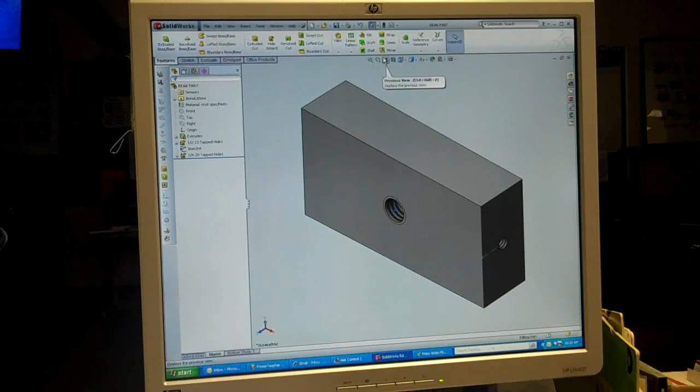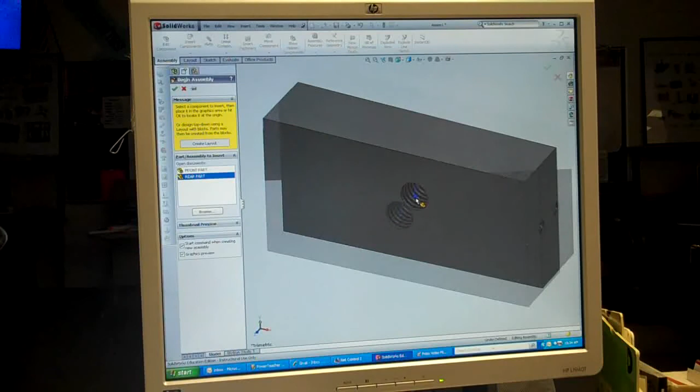To create an assembly, one of the first things you're going to do is go into File, New, and you're going to open up an assembly within SolidWorks. And then you're going to place parts. You should always have your origin on. And I'm going to grab the rear part, pull it in, and once I cross over the origin of the assembly, you're going to see the two origins are going to coincide.

You always need to have a base part, and then everything sort of forms off of that. Okay, so in this case the rear piece is that base part, and I'm going to save that, and we're just going to call it test for right now. Remember, everything's always in capitals. Makes it easier for you when you're creating automatic title blocks. So the assembly now has this in here, and if you look very closely, right in front of rear part it says F. That means that that part is fixed in position and it's fixed on that origin.

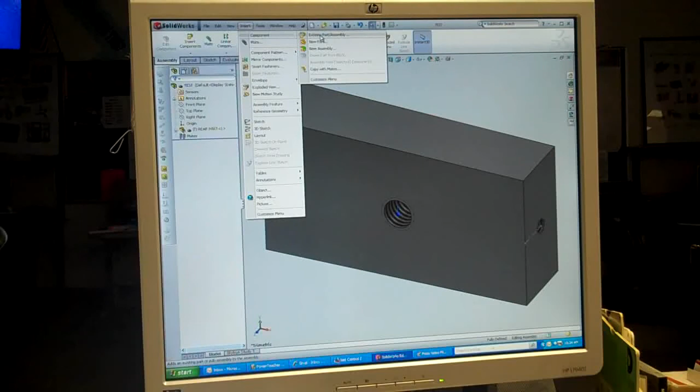The next part we're going to insert is an existing part, and it's going to be front, and we're just going to drag it in here somewhere. Okay, and this is where we're going to get into different ways of constraining things. Now, if these parts are always the same, and in this case they're 4 inches wide and 2 inches tall, one of the easiest ways of constraining the front to the rear is you're going to grab this, and in the book they call it constraints. In SolidWorks we call it mating. So you're going to mate the top surface to this top surface, and you're going to see it move up.

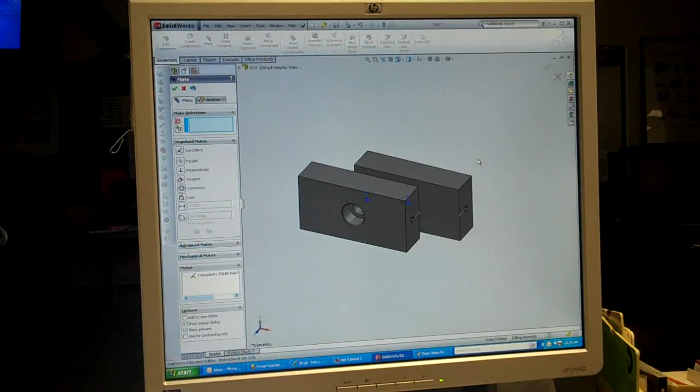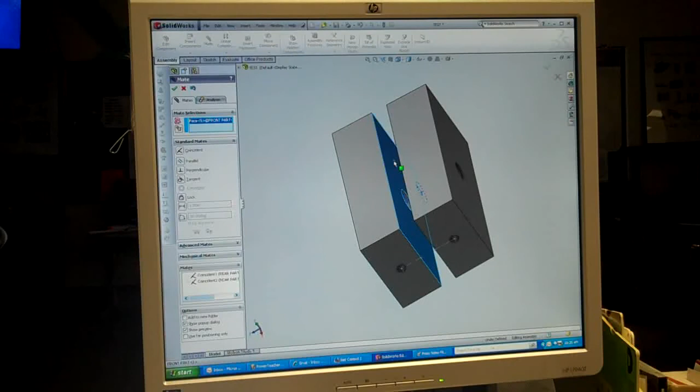So if I went to a front view, I can see that those two top edges, this one and this one, are in a line. And then the next thing I could do is a right face to a right face. Okay, hit the happy check mark. And if I again go to the front, now I can see the top and the right are aligned. And then lastly, we're going to do the back face here and the front face of the rear part, and everything's happy. Okay, this is great if your parts are always symmetrical like this, and they're, say in this case, 4 inches wide, 2 inches tall. Okay, and everything is a happy world.

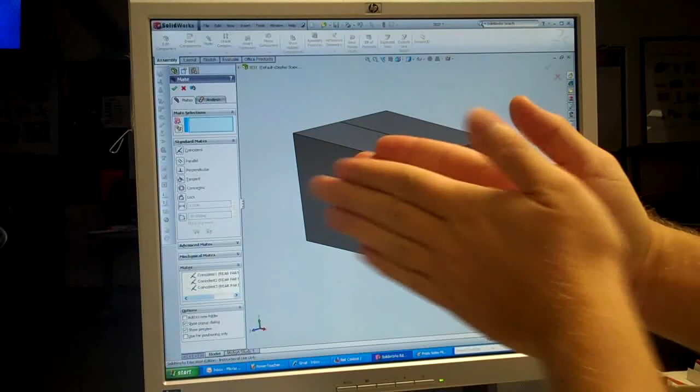But if the back part is still 4 inches wide and you have a design change and the front part becomes 3 inches wide, then you're going to lose your hole alignment. So this is a basic way of aligning things face to face. And the last one that I showed you, the rear face to face, is usually used when you want to have two surfaces mate together, okay? Just like they are here. Imagine it just like this. They're together, and they're not going to move off of that plane.

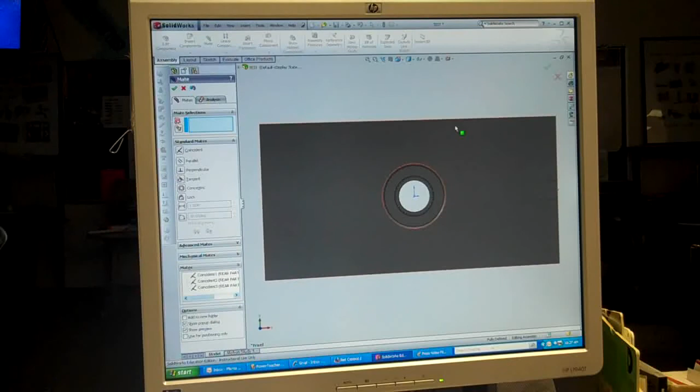But these other things, the top face and the right face, if they change in size, they get taller, wider, whatever, these faces will shift your hole alignment. So if I go to the front view, right now the hole's lined up nice and perfect. So let's look at another way of doing this. Okay, and let's close all this. We're not going to keep this, so I'm just going to close it. You want to save it? No. And the rear part is still up.

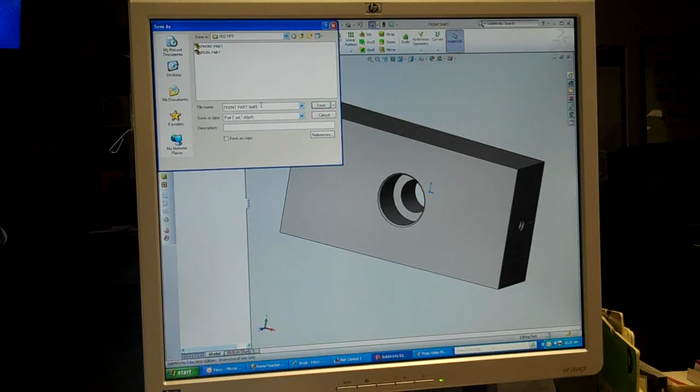Let's open up the front part, and I'm going to save it as front part narrow. Okay, we're going to save that. Part name is up here, and I'm going to change its original size. So I'm going to make it 3 inches wide, and you'll see why in a second. So as easy as that, I can change the size of my part. So the first thing we talked about was faces. Top face to top face, right face to right face, front and back face. Put all this stuff together. Let's do another assembly.

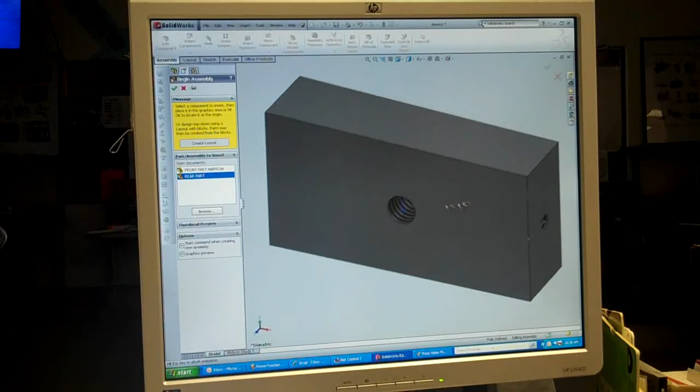And the first thing we're going to do again is turn on our origin, and we're going to throw the rear part in there again, let it find its center. Okay, so it's happy. And we're going to insert a component, it's the existing part, and we're going to do the narrow. Okay, so we're just going to drop it off here.

So right now, the narrow part, if I did faces, the top and the top would still line up. The right and the right, you could line it up, but then your hole doesn't line up. Okay? I would still use, though, this face to this face because they're mounting flush to each other. Okay? So that's not a bad deal, but to get by this, there's two different ways we can do this.

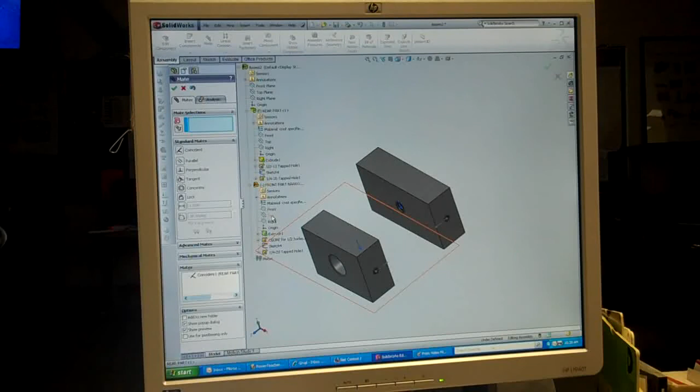Number one is we can do mates also by planes. So if I go and open up my design tree on the front part there, I can use my right plane and the right plane of the rear part, and it's going to line those up. And then I can use the top plane and a top plane here, and that's all lined up.

Okay, so if I look from the front view, my circles are lined up, has nothing to do with the edges of the part. Okay, and then lastly we can do face to face. Okay, and everything's lined up very nicely.

Okay, so that's another way to do planes, but you have to remember when you're designing that if it's going to be something like this where you're going to want to use planes to mate part A to part B to part C and so on and so forth, everything has to be drawn symmetrically off of those planes individually. So this is another way to do it.

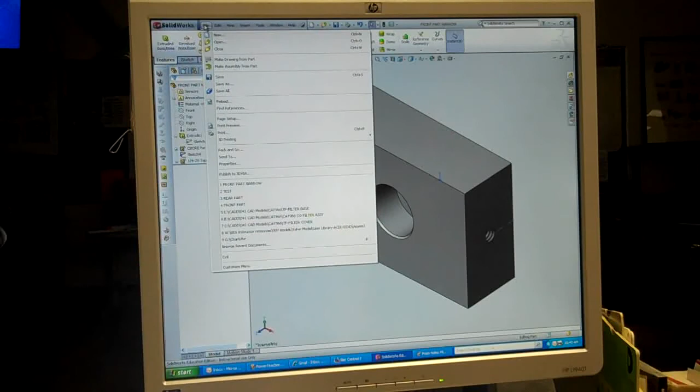Let's look at another way. So we'll get out of this, and we're going to close this assembly. We're not going to save it. And we're going to do another assembly. We're going to turn on our origin. We're going to throw the rear part, let it find its center. Zoom out a little. We're going to insert an existing component, which is the front narrow again.

Alright. And another way to do it is go into View and turn on some temporary axes. So now I have the center of each hole. What I can do is I can do a mate by axis. So I'm going to grab the axis of this counter bore and the axis of this tapped hole. They're lined up. Okay? But they're not totally aligned yet because I can grab it and rotate it.

To get rid of that, I can grab the right face and the other right face, not use coincident but use parallel, and it'll turn. Okay? So it'll always keep it square, so no matter where I move it, it is parallel from here to here, and it is aligned by axis.

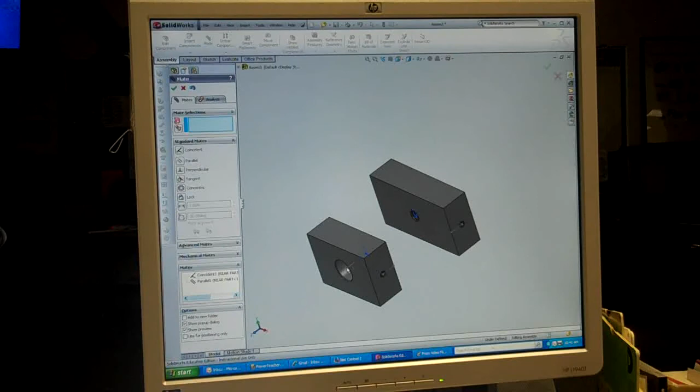Okay? And then lastly, again, we're going to do face to face, which is great when you're doing parts that are flush with each other. So that makes a nice happy part. Okay, happy check mark, and we're good to go.

So we've covered face to face, which works if everything's symmetrical and the same size. We've talked about planes. Okay, that is great if everything is symmetrical about a plane when you're designing. Axis. Axis is great for lining up holes. Okay, because you can always go back in and change your hole sizes, but as long as the axes stay in the same position, it shouldn't affect how your part is put together.

Moving on, bottom-up modeling. Okay, bottom-up modeling is exactly what we just did. We've created the rear part, and then we created the front part separately in a different drawing, and we've put them together. So we have two bottom-up parts. This is very common when you're throwing simple drawings like this together.

Bottom-up also refers to you have bolts that you're going to put into this. Well, a bolt is a purchased part. Any purchased part is really a bottom-up model. You're going to design it, and then you're going to bring it into your final design. So that's what bottom-up is.

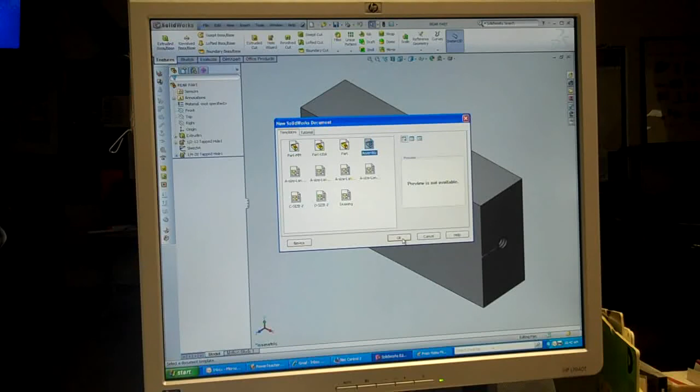Top-down modeling, what that means is you have existing parts, and what we're going to do is we're going to close this out, and we're going to close this, and we're going to do a new assembly. Okay, again, we're going to turn on our origin. Rear part, we're going to find its happy center.

Zoom out a little, and we're going to insert a component that's existing. We're going to browse, and we're going to make sure we're in the part mode. And we're just going to do the front part, the original one. And we're just going to drop it in here.

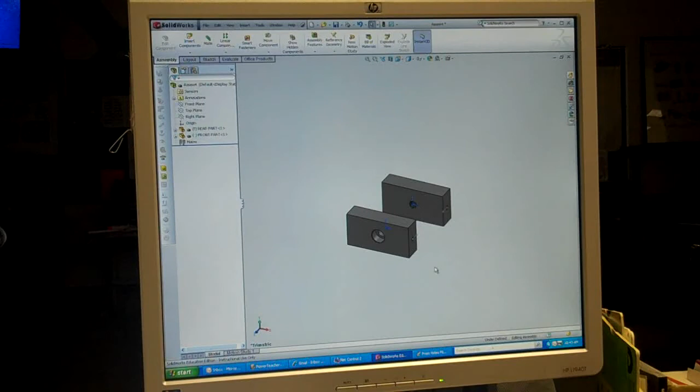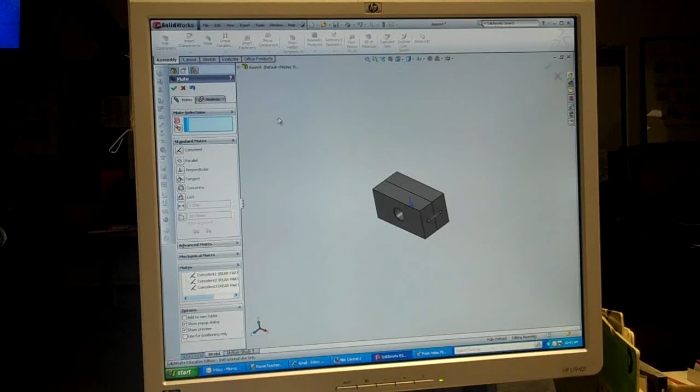So, we have many ways to constrain it. Right now I'm just going to mate just using faces. Okay, so it's going to line it up quickly this way, right to right. Okay, because I know this part is never going to change in width or height. And then face to face for a flush fit. Okay, happy check mark. When I bring it in, everything is constrained nicely.

Again, this is bottom up modeling. I've created the back part separately, the front part separately, brought them into an assembly, and we have what we have. Top down is when you use geometry off of a part to create a new part.

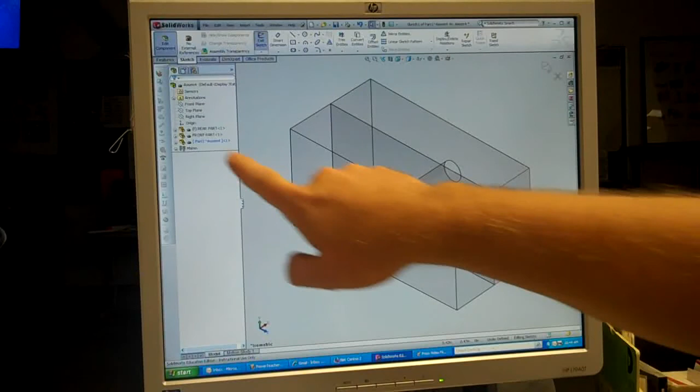So if you go up into SolidWorks and you go Insert, Component, you're going to say a new part. First thing it's going to ask you for down here in the bottom, it says select a face or plane on which to position the new part. Well, I've got these two tapped holes here for a reason. So I'm going to select this face. Everything turns translucent, okay, because now a new part is shown. It's written in a dark blue. It says part of another assembly.

And I can start grabbing an edge, and I can convert that edge, and convert this edge here, this bottom one, and then this far one on the left. And the next thing I'm going to do is I'm going to trim to corners. So I'm going to grab this to this, okay, and this to this. And then if I go into features, because this is a closed block, I should be able to extrude that in some direction. I say a ½ inch.

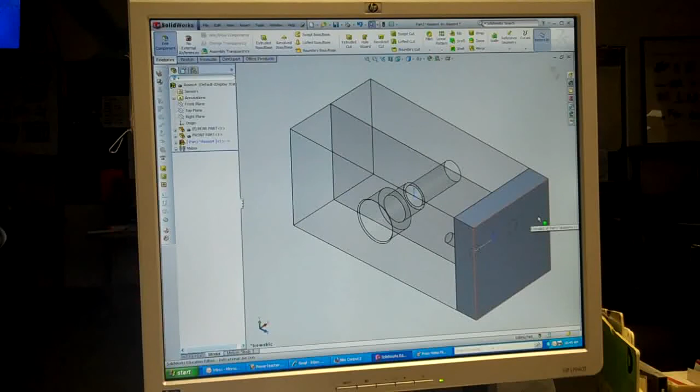Okay, and now I've created a part within the assembly. This is top down. I've used existing geometry of two mated parts to create a third part. And to take it a little further, I can grab on this right side and go to my right view. I'm going to sketch on here, and I'm still in Edit Component, okay, that should be turned on, and this will still be in dark blue.

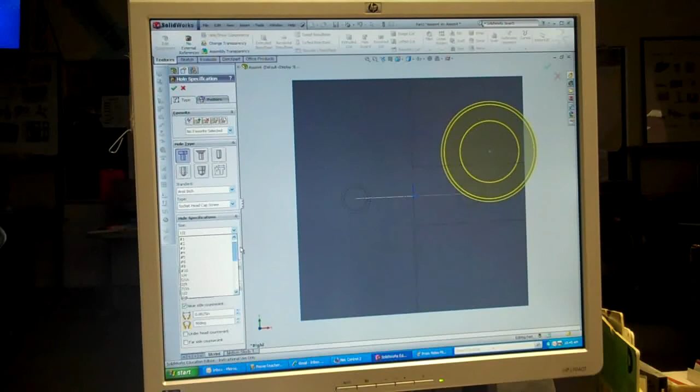And I'm going to go Hole Wizard, and I know these are 1/4 because I've designed it, but I'm going to put in a socket head cap screw. I got to get the right size, go from the drop down to 1/4, and then positions. Okay, well, I can use this and this other sketch from the other one. Escape once, grab the one that was just showing up, and if I hit the happy check mark, I have two counter bores created at the exact position they need to be in a top-down design.

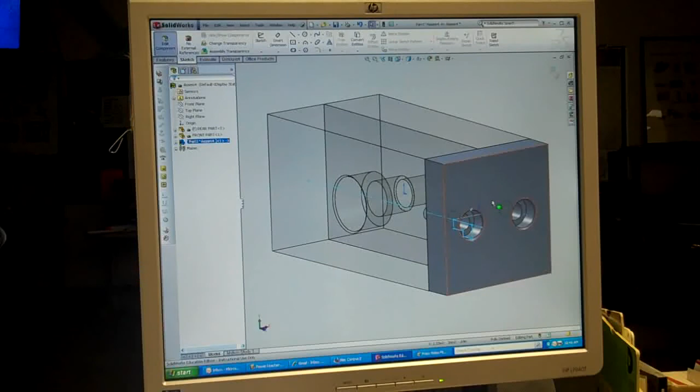So again, it's using reference geometry from the original two parts so I can create a new part within the assembly. This is really handy when you're doing a lot of complex components or positioning them in an assembly, and then you have to start making brackets or mounting pieces to keep one together with a second. So that is top-down modeling.

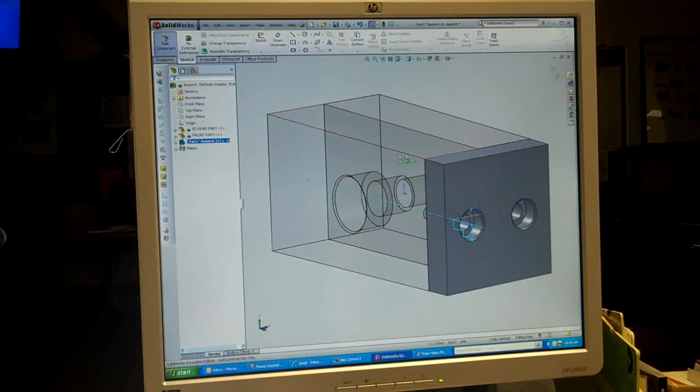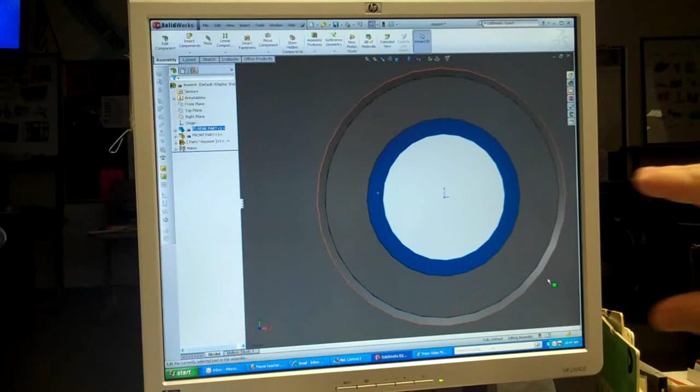Clearances. Clearances are how well does something fit together. Okay, so let's get out of this edit component, and we're going to go to the front view. If I zoom in here, this is part of the counter bore, but back here is the tapped hole of the second piece. This larger hole is your clearance diameter for the 1/4 inch bolt to fit through as a counterbore feature through part number 1 or the front part and tap in or screw into part number 2. You need this clearance around it for that hole to get in there.

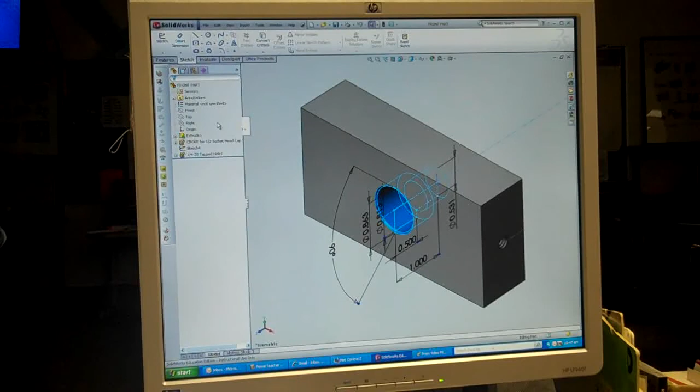If I open up this part and I look at this counter bore, and I'm going to just edit that feature. The size is the ½ inch size, or relates to your thread size, which is your major diameter. The fit, if I go close, you're going to see this little circle get smaller. Or if I go normal, it gets a little bigger, or if I go loose, it gets a little bigger.

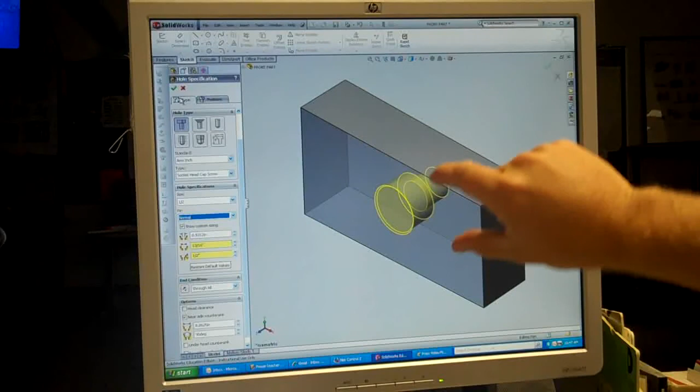Generally, you'll always use the normal fit, okay, for the clearance of the screw going through that hole, so it has a little bit of wiggle room to get through, and then it goes into its mating hole or the tapped part. Okay?

Interference is just the opposite, right? Clearance gives you clearance around the part. If that hole was too small, say it's a 1/2 inch screw and the screw is a 1/2 inch diameter, but you made the hole 0.490 in diameter, you're going to have to force that screw through the hole, and you have interference. Okay.

Associativity is how do the parts associate with each other.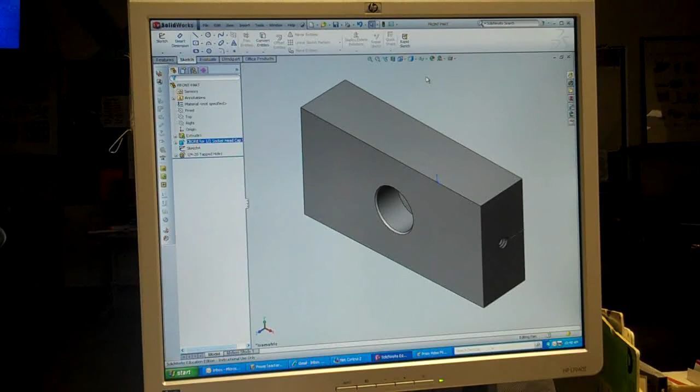Okay. Not only is associativity about how you use planes and things to get things to mate, but associativity is also this hole lining up with the second hole behind it. It's associated, all right? It's especially associated here, where we did a top-down drawing or model, so that if the hole location changes on either one of these, they're associated to that part.

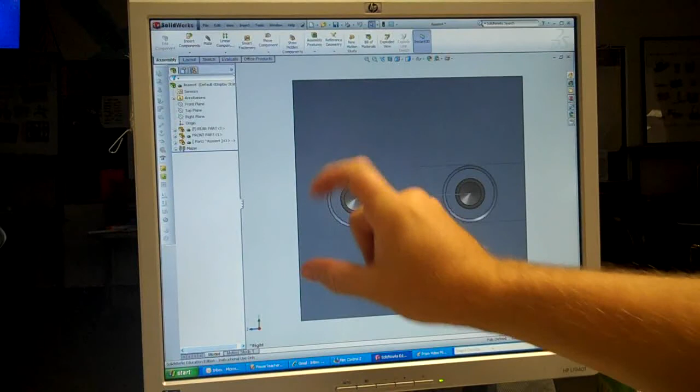So if I changed this location of the tapped hole on the front part and it went to the left, because this is associated with this little sketch right here, it should also move. So if I go to that front part and I grab this sketch and I edit it, okay, we've got to save this quickly, so let's just save this.

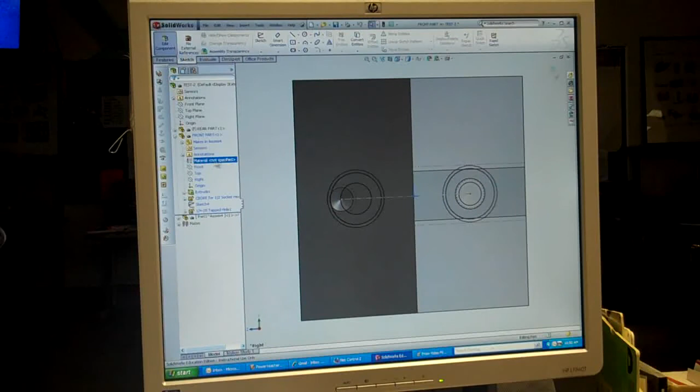We're going to save it as test 2. Save it as test-2. Okay. So it's test 2. Now let's see if we can go into that and grab that sketch and edit it. So if I change this to 0.625 and close that and then just do a rebuild with the stop sign, you can see how it moved.

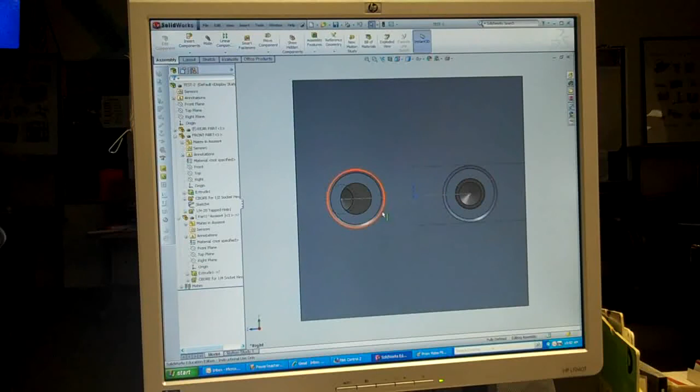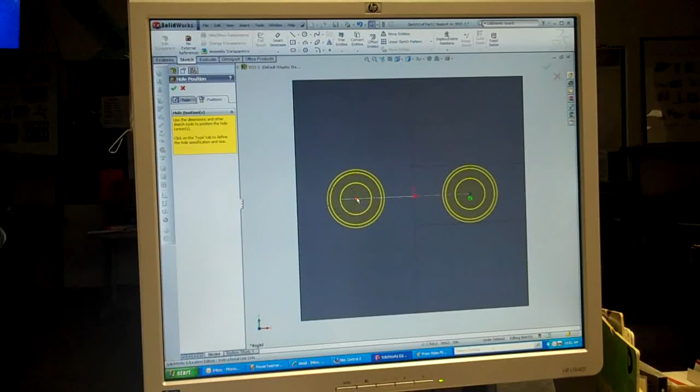Okay, but it has no more associativity. So this hole has to be associated with it in a different way. So if I go into that and I edit that feature, and I'm going to go to positions, this here, right, it's lost its coincident, so I'm going to delete it. And add a relation to the center of this. Let's see. Now let's go back to our right view. Try that again.

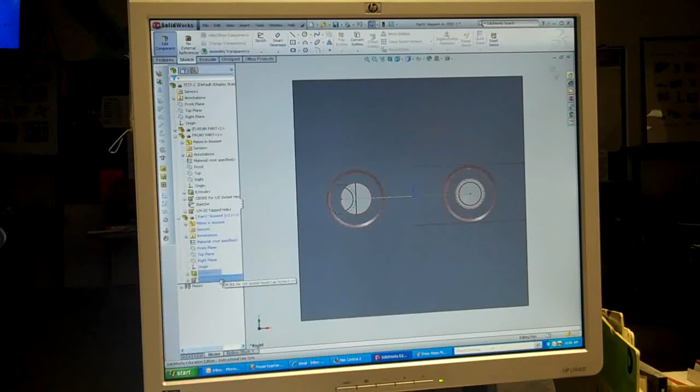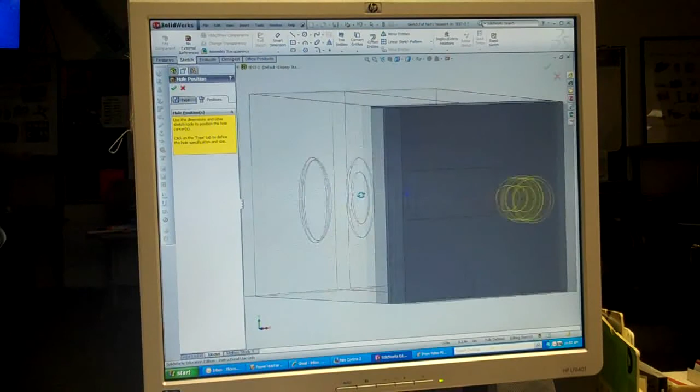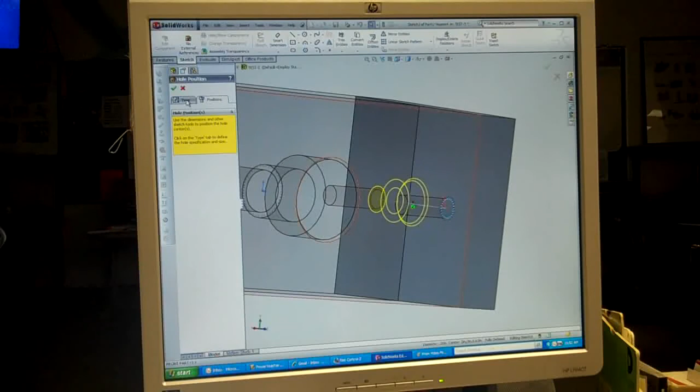If I grab the type, it's the counterbore, I grab its position, and I delete it. And again, I go into position. I can use the end of the line, that little sketch that I used, or I should be able to grab this. I select other and I grab the edge. We still want to associate this correctly. Edit this feature. Try position again.

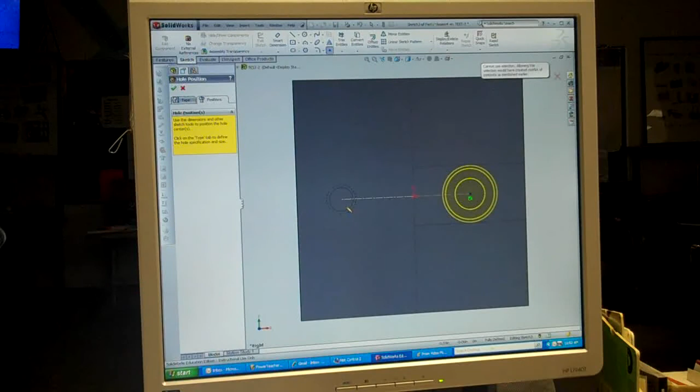Okay. And if I go directly looking at it and I grab that little piece of the line that I changed, it will go to that correct position because that's what I changed it to. Okay, and then I can get out of edit component, and now it's associated correctly again with the hole. That's associativity.

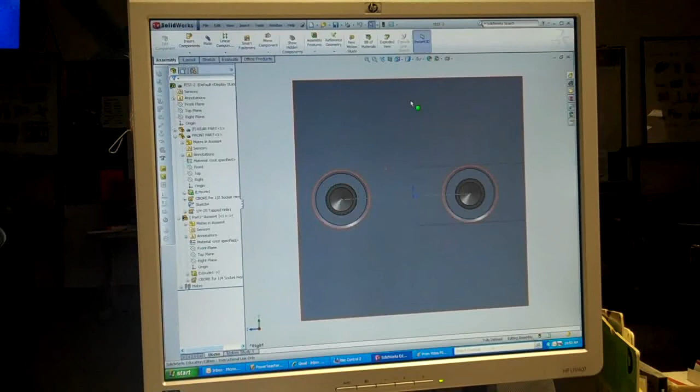Another thing that's covered in this chapter is an exploded configuration or an exploded isometric drawing, or an exploded assembly drawing. What that means is all the parts are shown. Let's just do a new assembly again quickly. And we're going to turn on the origin. We're going to put the rear part. So instead of showing them assembled, I'm going to insert another part, which is the front, just somewhere.

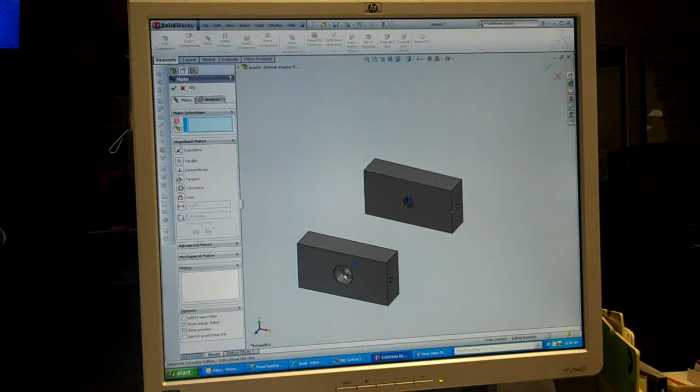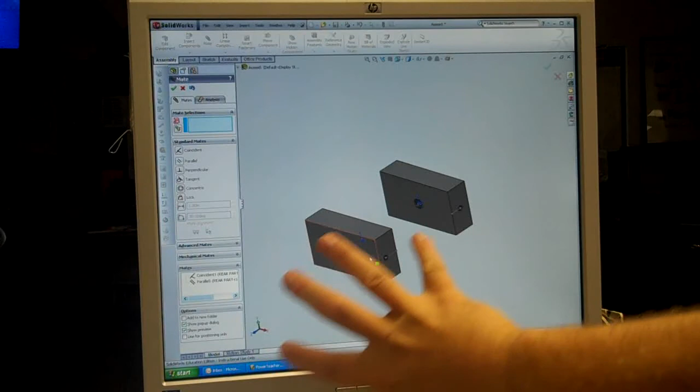There are usually phantom lines or center lines going from this hole to the back of it, showing the direction that it's going together. And then in front of this you can have a bolt hanging out here, showing that it's going to go through this hole, collapse these two pieces together so they're flush, and then you're going to screw it into this hole, and everything comes together in a nice assembly. So that's an exploded assembly, or exploded configuration as they call it in the book.

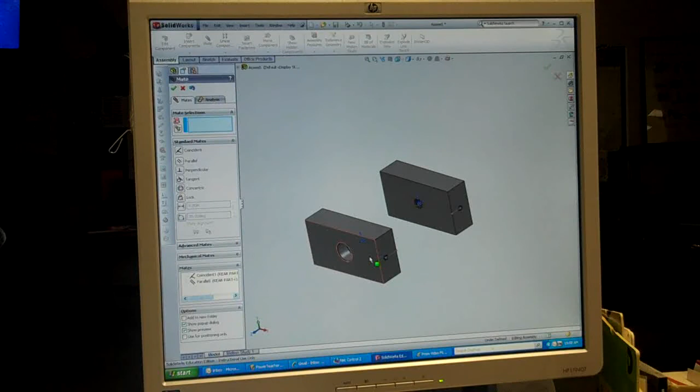Hierarchy goes back to, let's go back to test number 2. Hierarchy is which came first, the chicken or the egg. Well, the first part that you put in here was the rear part, then the front part, then this side component. That's how they're all placed in. It's also what you call a parent-child relationship, where not only is this the parent telling you where the child is going to be in relation to it, it can also tell you that this, because it came in third, is related to the first one and the second one.

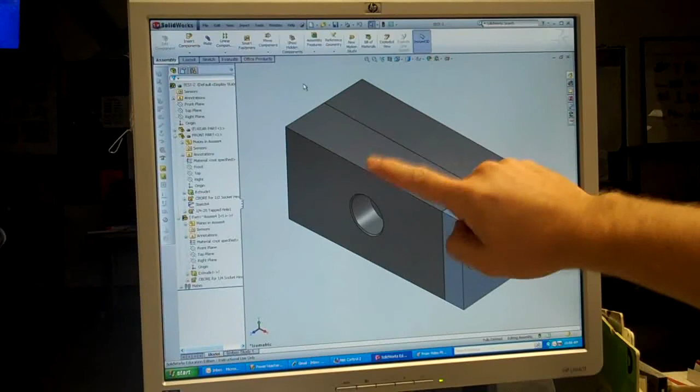So this could be like the grandfather, the father, and then the son, or the grandmother, the mother, and the daughter, right? Where grandma set the rule. The mother came in, she's mated to this, and then this piece is sort of mated to both of them. Okay, so it's hierarchy and a parent-child relationship between the parts.

Instances. An instance is how many times that component shows up in your assembly. Like in a bill of material, you might use the same bolt 10 times. Okay, so there's 10 instances of it. You may only have to show it once. You may have to show it 10 times to show where it goes in the assembly.

But when it does the automatic build generation, it is going to show you that there's a 1/4-20 socket head cap screw that's 1 inch long, and there's 10 of them used, and a bubble is going to say whatever part number that is. And finally, that brings you all around to bill of materials.

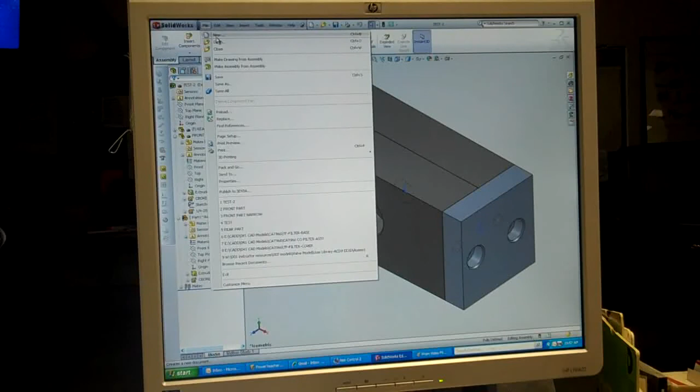So with this very simple drawing, I'm going to go into a new drawing, and we're going to try A size, see how that works. And we're going to import test number 2, and we're going to do an ISO of that. So there it is. Okay. Very simple. Again, if you type it in capitals, then down here, it already fills it in capitals. All title blocks, every note on a drawing should be in capitals.

And let's try to insert a table. Okay, so that's up here, Insert Table, Bill of Materials. Specify the drawing, so you're going to just grab this view, let the orange light up. And let's go top level only. And we're going to be happy with everything. Standard bill of material. Okay, and as you move it around, it'll sort of anchor itself to the top. You see it sort of catch itself there, and the same thing to the right.

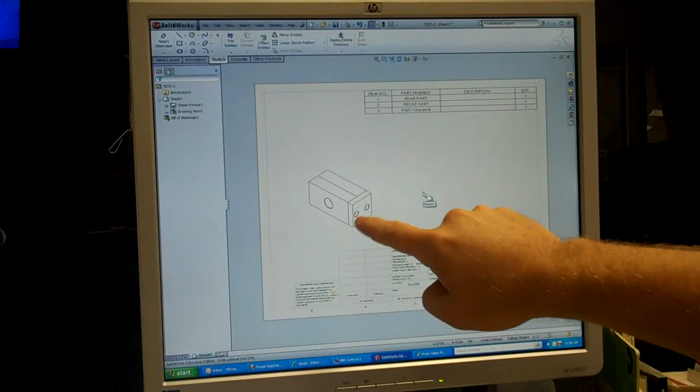Okay, so we have part number 1, right? Is the rear part. Part number 2 is the front part, and part number 3 is sort of a weird name of this part. And then quantity 1 each of these. If I go into annotation and I start doing balloons, I can grab this. It automatically numbers everything. Okay?

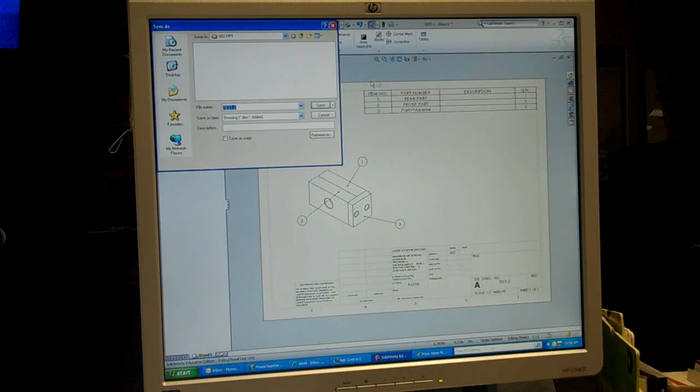So, part number 1 is the rear part. Part number 2 is the front part. Part number 3 is the part with the funny name. How do you get rid of the funny name, you ask? I know somebody's asking it. Let's go back to the assembly itself. Okay? And there it is. Let's open up this part.

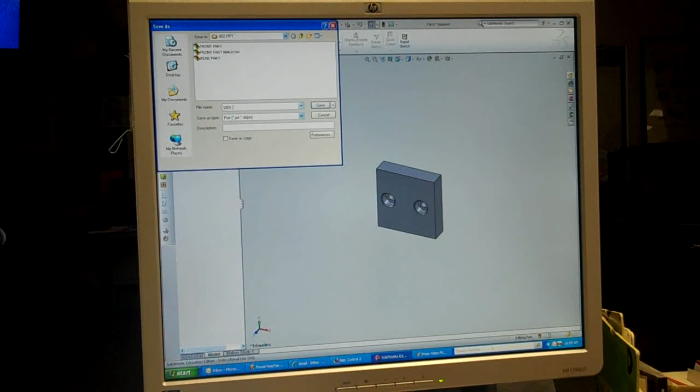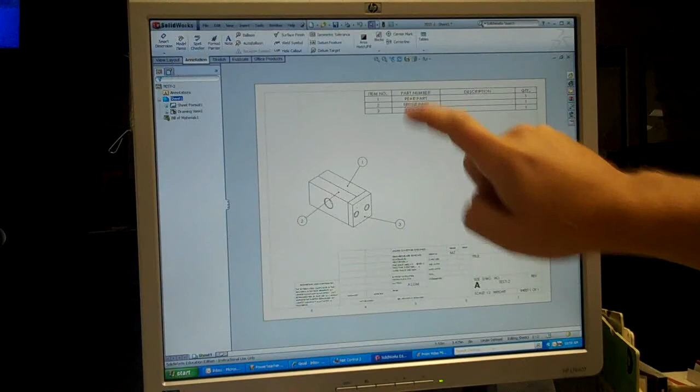And we're going to go in File, and we're going to do a Save As, and we're going to call it Side Part. Okay? And we're going to save that. It's going to change it up here. Alright, if I go into the assembly, it's going to change it in here. Okay, so rear part, front part. Now that's changed to side part. Save it. And then if I go into the drawing sheet and I hit the refresh, now it's rear part, front part, side part. Okay, everything has a name.

Description. Description can tell you that it is a purchase part, and it just says a 1/4-20 socket head cap screw. Description can tell you about the material. The rear part is 4 inches wide by 2 inches tall and 1 inch deep. Okay, and it's aluminum. Front part, same size. It's 4 by 2 by 1, but it's CRS, which is cold rolled steel. That's the abbreviation for it. It could be CI, which means cast iron. And the side part could be made out of, let's say, plastic.

All right, so it's going to say how big it is, for stock size. And the stock size needs to be known when you're ordering material to have the parts made, or the machinist knows how big to start the part with, sort of square it up, so then they can start machining all the fine details. It also helps with figuring out how much material you're going to need to make 100 of these. And of course, material, you need to know what it's made out of to make all this stuff happen.

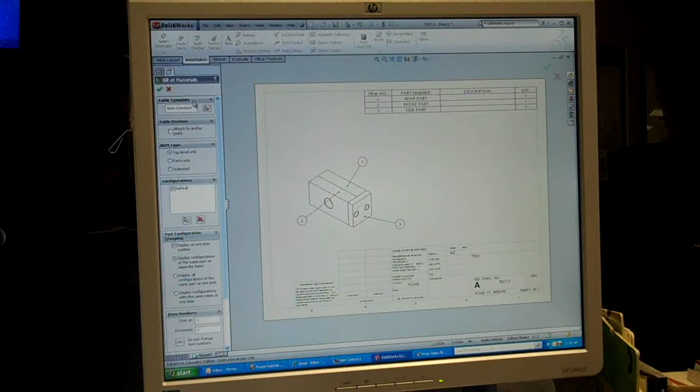So again, quick review: to insert a table, you go into Insert Table, Bill of Materials. Again, you select this, it highlights with the orange. Bill of Materials Standard, which is pretty much this. Top level only. If you do parts only, that is if you have sub-assemblies within everything else. A sub-assembly is like this little assembly could be a sub-assembly placed into a larger assembly. So sometimes, do you want to have all those parts named, or do you just need to name the sub-assembly? It's kind of up to the designer. Through experience, you figure out which way is the best way to do it.

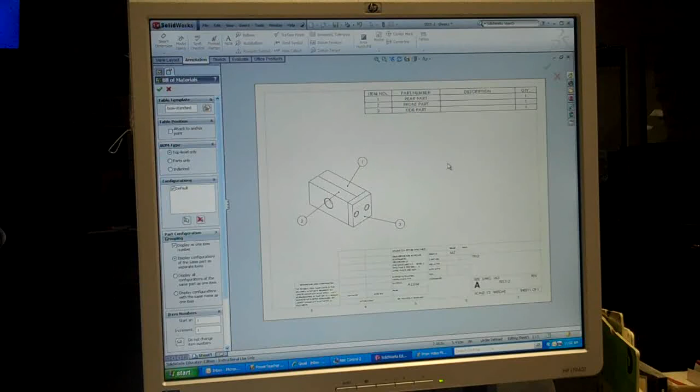So that kind of sums up everything for Chapter 7 from the Engineering Design Fundamentals Handbook. Basic constraints, understanding bottom-up and top-down modeling, clearances, interference, associativity, the exploded configuration or exploded assembly drawing, the hierarchy, parent-child relationship, instances, how many of a component is used within an assembly, bills of material, how they're created within SOLIDWORKS, how it does it automatically for you, and that kind of wraps it up.